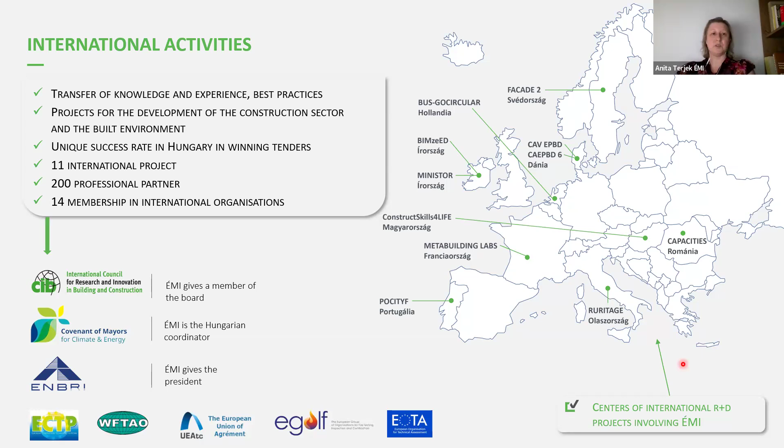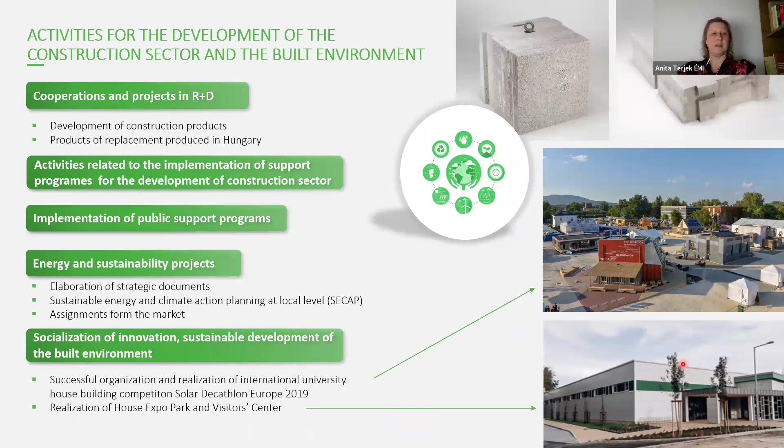Let's see the international activities of EMI. As Professor Hestek mentioned, we are members of many international associations: the CIB, the ENBRI, the EOTA, and the ECTP, the European Construction Technology Platform. I will show our activities, providing details of these international projects we are doing, and just have another slide showing what we are doing.

Beside these two directorate activities, we are involved in regulation and other projects like sectorial researches and technical security control of elevators.

Now, back to my title, what I would like to show you is sustainability. Regarding sustainable construction, we have to take into account the building stock. That is what I would like to show you: our Hungarian building stock, the typical dwelling types, and showing those problems we are facing today.

Our built heritage is important, which we cannot really eliminate for technical, cultural, or economic reasons. In terms of the built environment, the existing building stock accounts for by far the most carbon emissions, and that's where the greatest opportunities for savings can be found.

I just collected the principles of sustainable construction. We have to minimize resource consumption, so conserve. We have to maximize resource reuse, use renewable or recyclable resources, protect the natural environment, create a healthy, non-toxic environment, as well as pursue quality in creating the built environment.

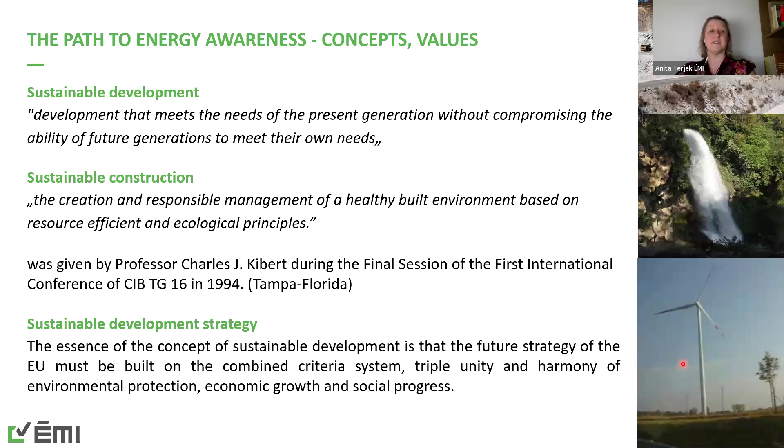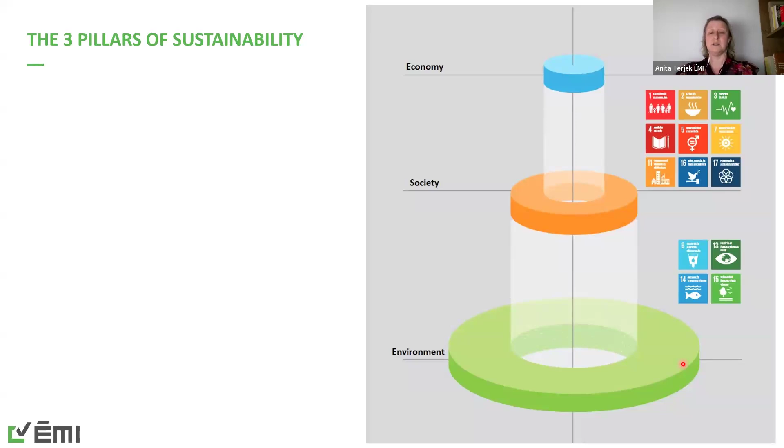I think the same happens in the US, but we are facing this here in Europe and in Hungary. Sustainability, in this case, depends on achieving the lowest possible environmental impact while encouraging social and economic development. Society demands new infrastructure as we are moving into cities, and our cities are getting bigger and bigger. So we have to take into account reduction in the consumption of energy and resources, and implementation of sustainable or green construction. These words are, I think, not new to you.

These are the Sustainable Development Goals, and we can say that these goals are ambitious and indicate a challenging path ahead of us. These SDGs were designed to be a practical implementation guide for sustainability, consisting of specific targets and measurable indicators.

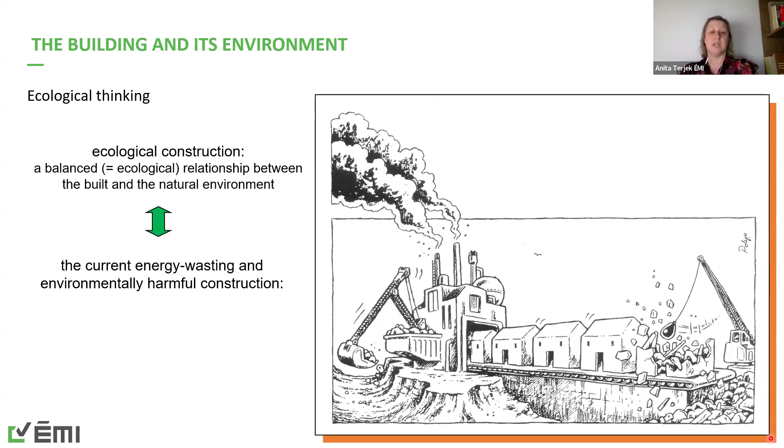In order to understand it better, we need to know the building and its environment, how they act upon each other. The environmental impact of buildings is also significant in terms of energy consumption, greenhouse gas emissions, and waste production. This is especially true if we look at the entire life of the building, as you can see on the picture, from the extraction of raw material to the production of building materials, through the construction, and then the end of the life cycle.

When I teach at the university, especially this construction subject, I usually talk about the two extremes, the two sides of the scale: the dark green and the light green group. The dark green group says back to nature, use only natural materials, use traditional technology, and minimize energy consumption. You can follow it or check it out in smaller settlements, family houses in Hungary.

On the other side of the scale, we can talk about the light green group, which says that we can use high-tech application. These are expensive but progressive solutions and lead into a large investment, in urban environments.

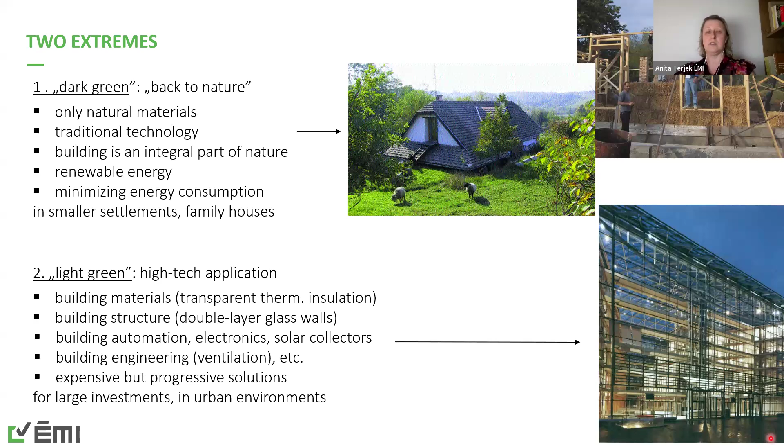So when we check that landscape and we would like to place our dwelling somewhere, we need to know the landscape, we need to know the wind direction, we need to know where the true north is, and we can place that house in the perfect place if we know these tricks how to do that.

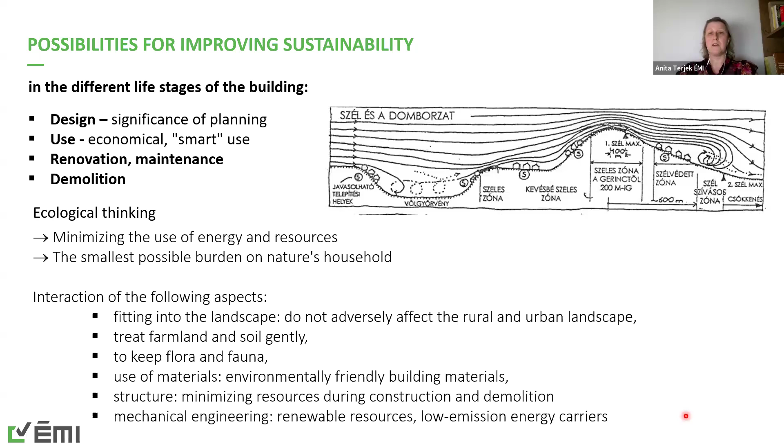The first project, what I would like to show you, is how we could reach not just the students or the scientific group around us, but we have this duty to talk about sustainability to the ordinary people, to the man on the street. So this project was about raising the awareness and widening the knowledge of the general public about the environmental impact we are facing in the building industry.

We prepared a handbook, not just in the national languages like Hungarian, you can see the consortium, or Italian or Finnish, but we provided the English version of it. In this handbook, we talk about LCA, we talk about requirements, and we collected best practices.

Beside the handbook, we provided a web application where people can check the environmental impact of different building materials and different structures. This is the point where I would like to show you one type of our building stock, which is this small house, part of the vernacular architecture, the origin of Hungarian folk architecture that goes back several centuries.

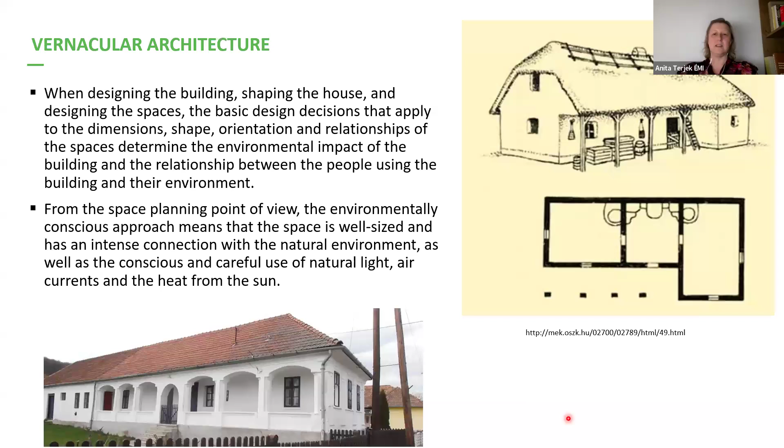So in the handbook, we put together all the requirements related to building structures and buildings, but in a simplified way—not a scientific version, but a simplified way so that our family members or somebody I meet on the street can really understand the problem.

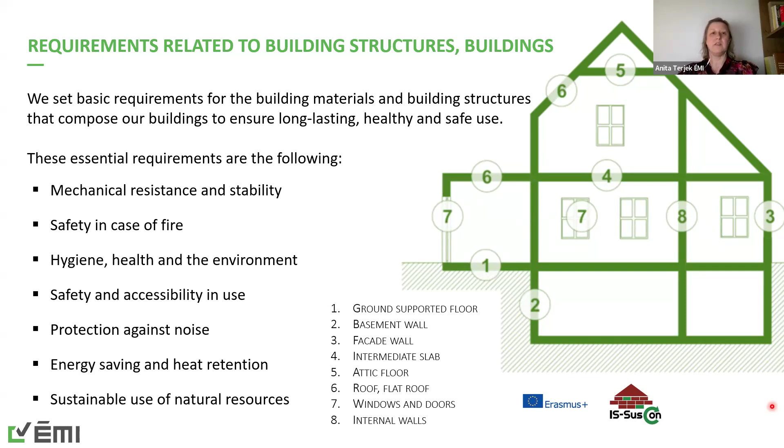We provided a small simplified house showing the different building elements, and in order to understand the problem, we provided the typical structures for these building elements and how we can evaluate the advantages and disadvantages of the different types.

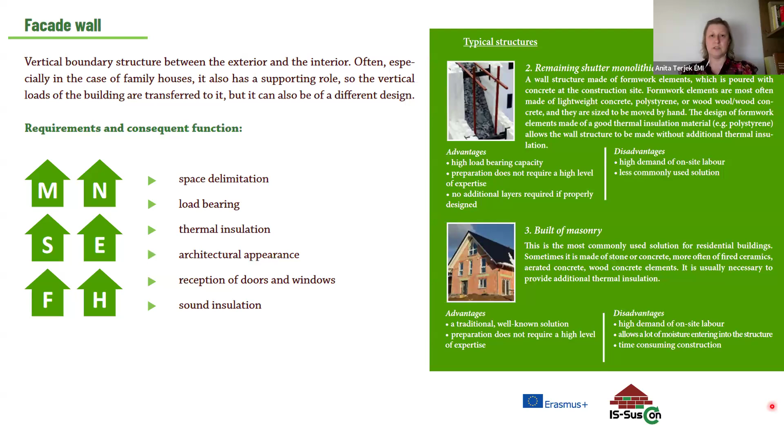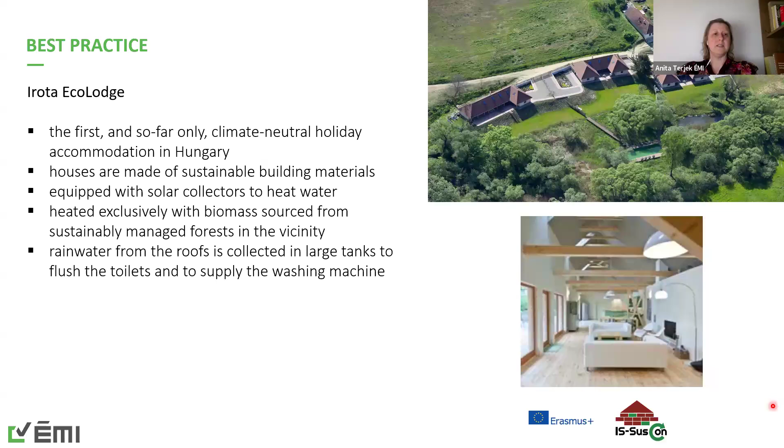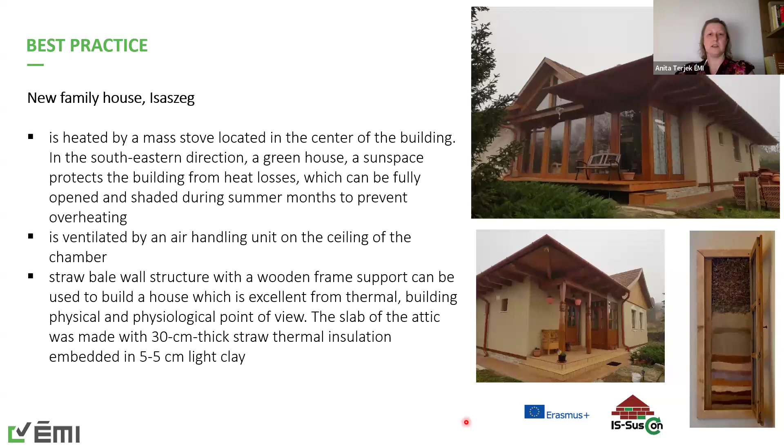Through that handbook and providing this information through the project, we wanted to show that not just the declaration of performance, which is a required document here in the European Union, but beside that DOP, the EPD, the Environmental Product Declaration, is also important. This declaration is a Type 3 declaration that can quantify environmental information or impact through the life cycle assessment of a construction material or building material. General rules are laid down in the ISO standard, and there's an independent third party verifying these values and results.

There are programs in the EU, what I showed here, and I wanted to just check if the same document exists in the US, and I got these programs: the SMART EPD, the UL Environment Laboratory, and the ASTM International, which is the Standardization Institute, as far as I know.

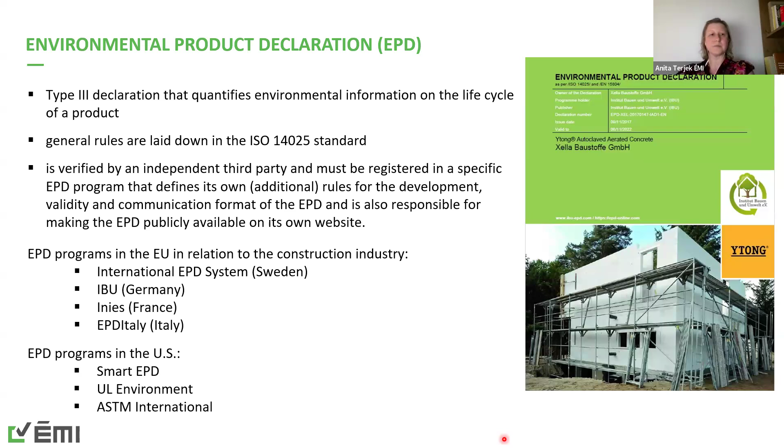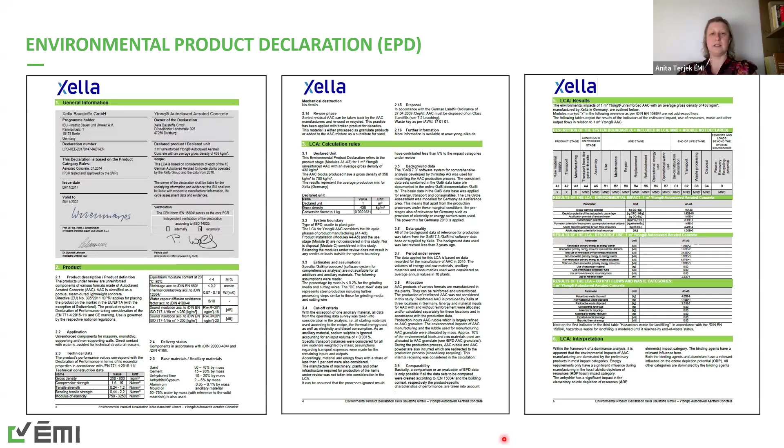Some details about the Environmental Product Declaration: providing description of the product, the manufacturing process, and then the LCA and those values, the results concerning the life cycle assessment.

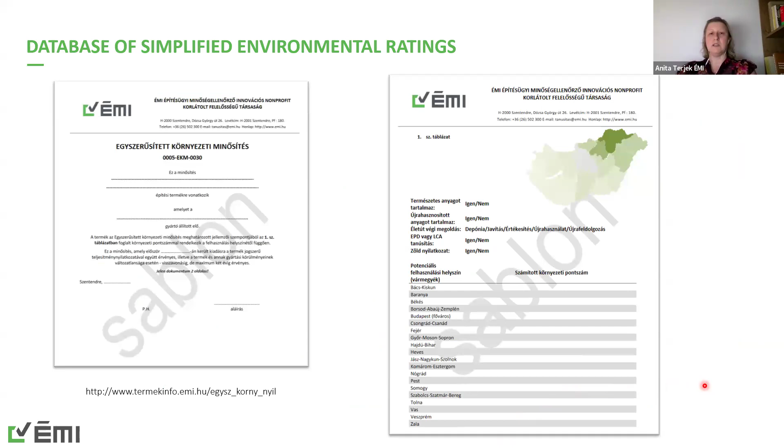And in Hungary, we are now introducing a database. There are simplified environmental ratings - we will do it soon. And there will be another database collecting the detailed green declaration. So it's not just a declaration in the future, we have to do it now. And these declarations are really important in the procurement.

I mentioned the term life cycle stages. Now I can show that to you. These modules are described in detail in this EN standard. According to this picture, we can talk about the product stage, the construction process stage, the use stage, and the end of life stage.

Not just a product, but a construction work, so for example a building. In the product stage, we take into account the raw material, the extraction, the transportation, and then the manufacturing. And we have to take that manufactured product into the construction site and create that building.

During the use stage, we need to repair or do some maintenance or replace some parts of the building. And this is our new concept when designing a building now. In the design phase, we have to take into account the end of life stage - what we will do with that building. We can just demolish it, but it's not the best; we can use some parts or reuse those materials. So that is what we would like to show and demonstrate.

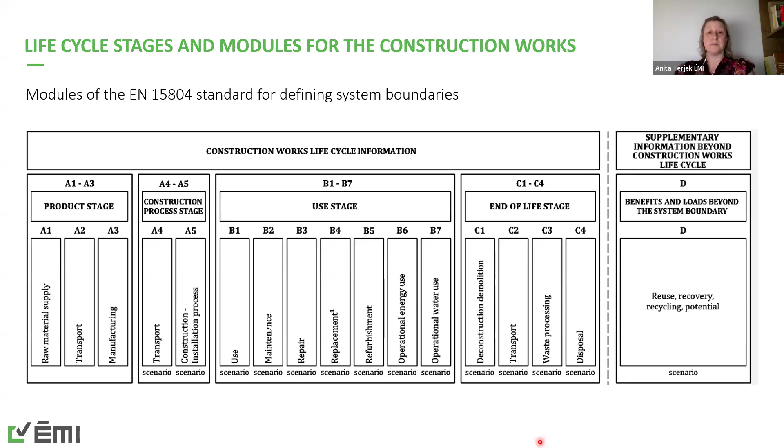The next project concerns the establishment, installation, or building of our headquarters. This project is called PIME'S - so it's a really good play with the words, 'play it more efficient, Sam'.

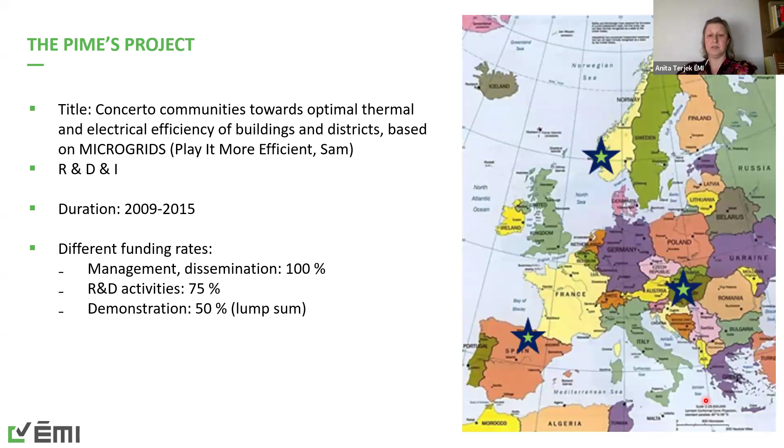This is the Concerto initiative that was established in 2005 by the European Commission, defining concepts were sustainability, replication, and cost effectiveness. The project aimed at revolutionizing and modernizing cities' energy systems. Let me show the pictures.

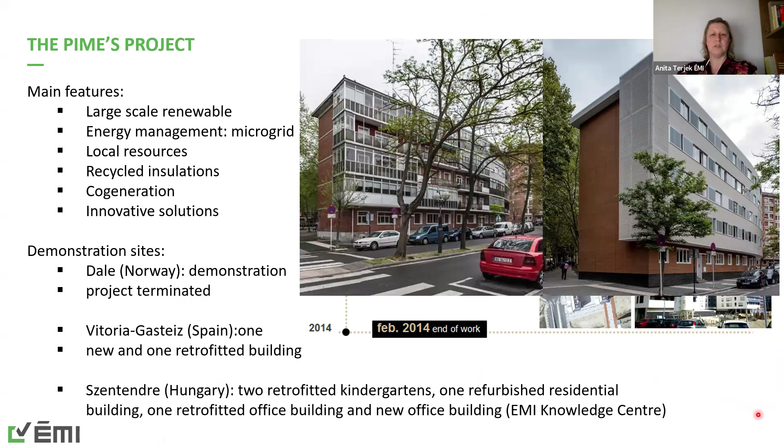The demo sites were in Norway, in Spain, and the last one was in Hungary, in Szentendre, where we have our headquarters. Let's see the map of Szentendre. Szentendre is a small town situated next to the river Danube, and this is just 30 kilometers away from Budapest to the north.

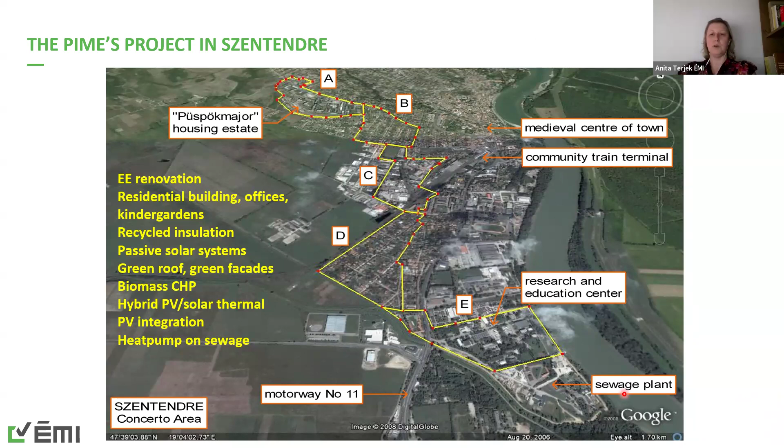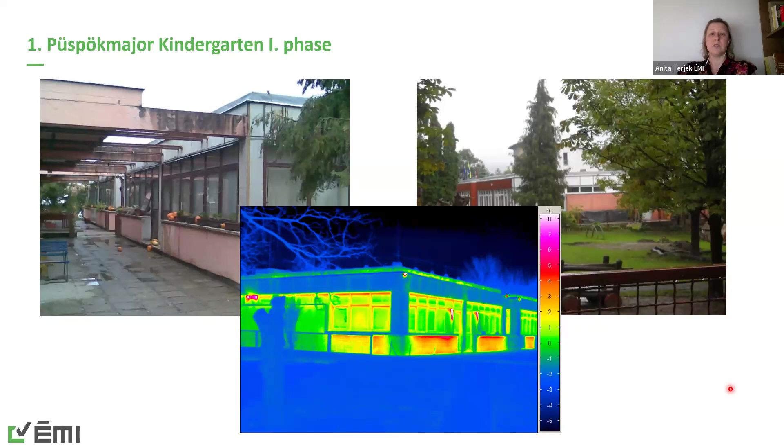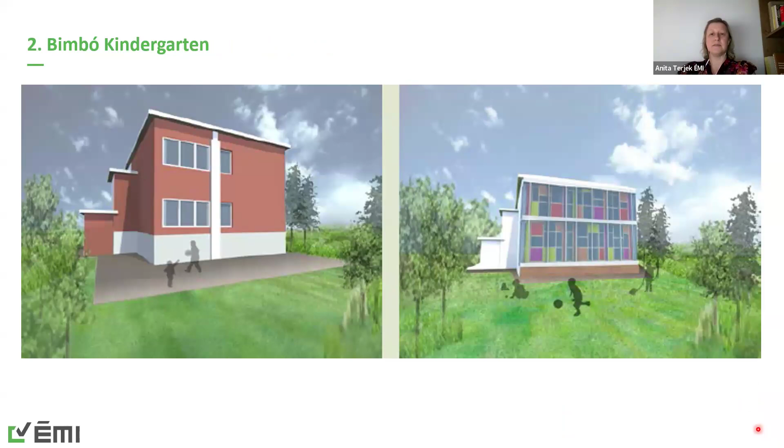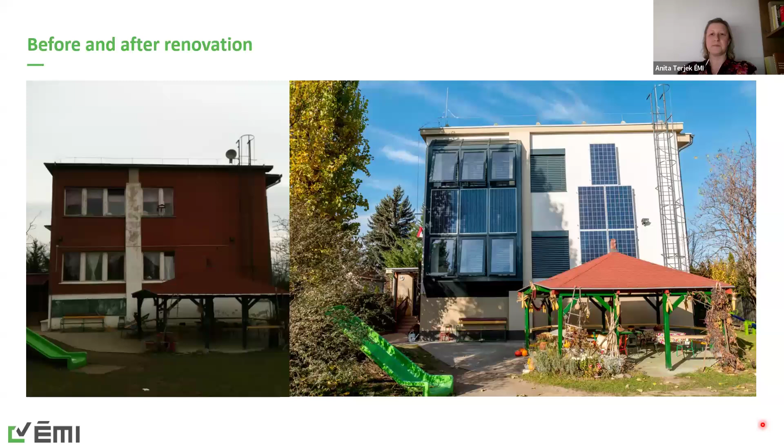In this project, we had 4 demo sites or demo buildings. The first one was a kindergarten - I'm going to show you some pictures about the demonstration work. Some new parts: the PV integration, the refurbished kindergarten, the 3D design, and now you can see in reality, you can compare the before and after picture. Not just kindergartens, but panelized residential buildings were refurbished.

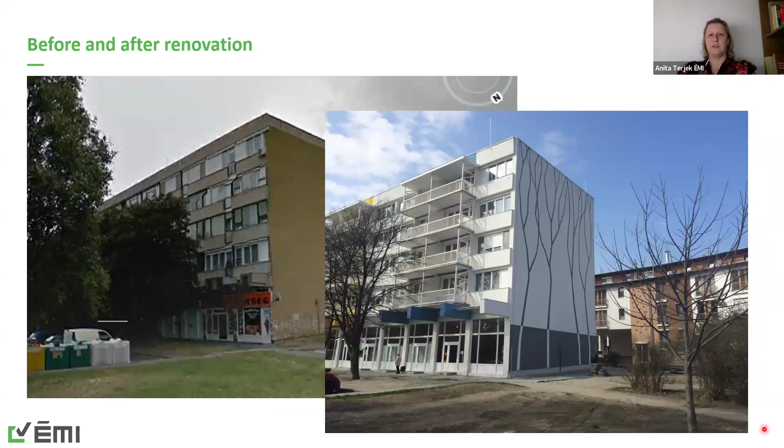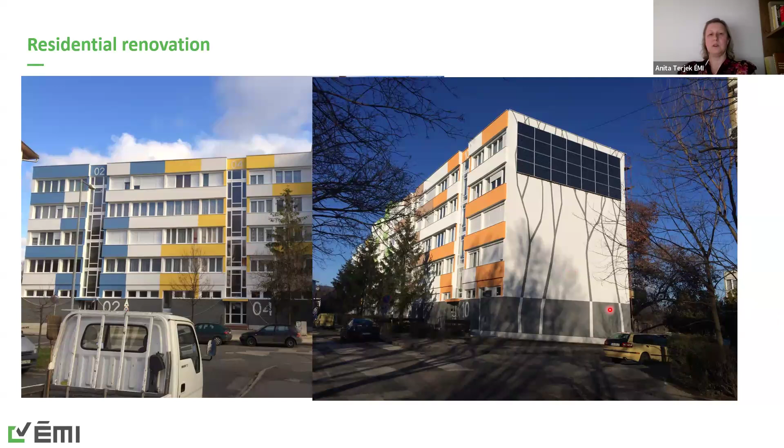Again, the before and after - really, really nice pictures showing those tasks like integrating PV on the facade, or just installing new windows and new facade insulation.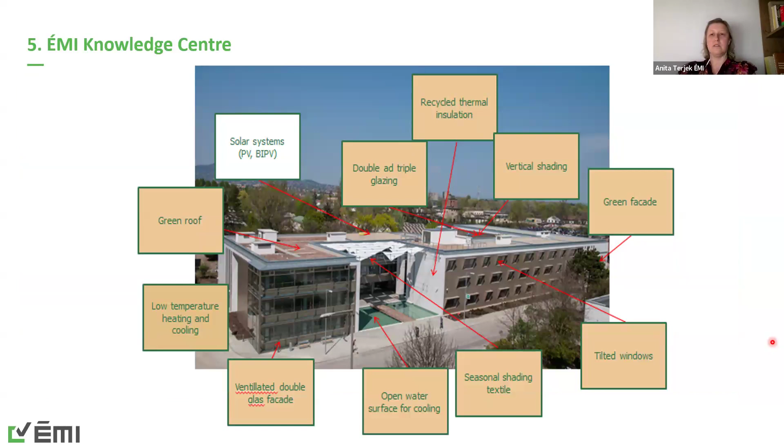This was an office building, refurbished, and now we reached our knowledge center in Szentendre, the headquarters of ÉMI. With this headquarters and the demonstration, we would like to show the bioclimatic design methods.

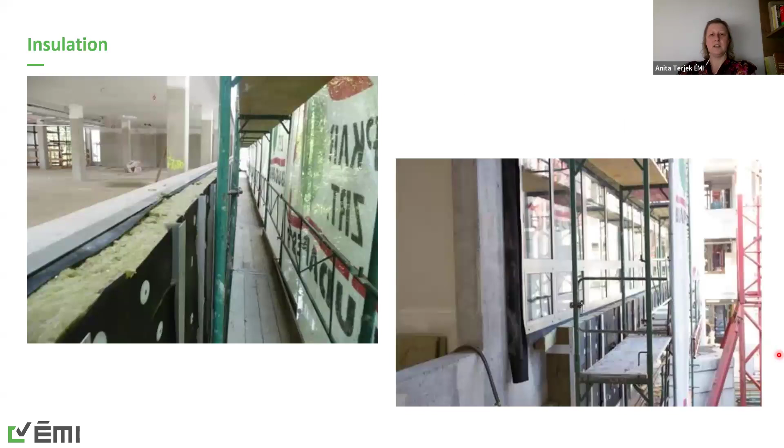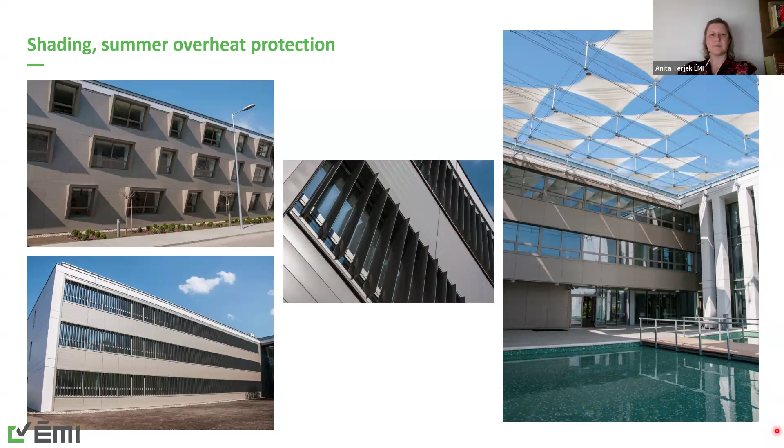Let me just show some pictures about insulation, different window types using the bioclimatic design, like these box windows where we can shade - we can use these boxes as shading. Green facade on one end, and on the other corner we can find a climate facade.

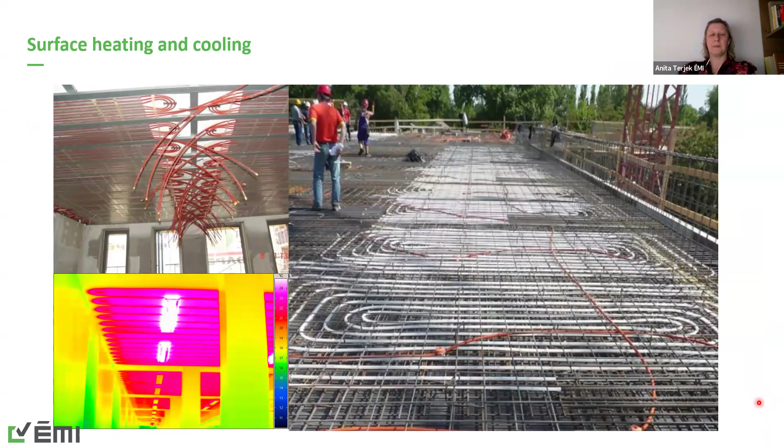We use low temperature heating and cooling system, and again, the use of solar panels integrated into the building in different ways can be seen here.

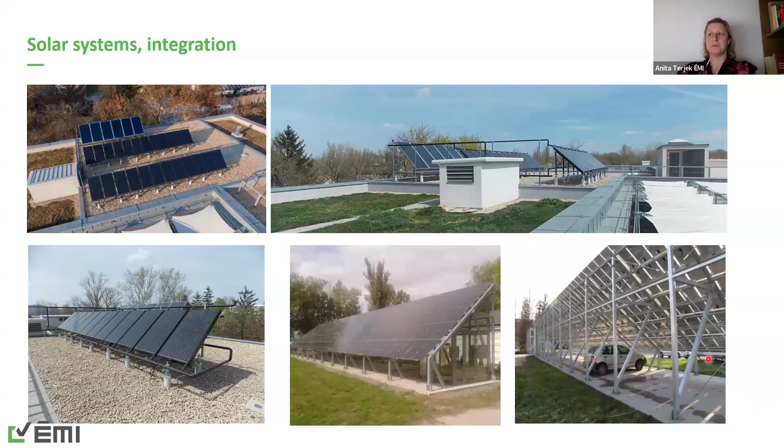When it comes to energy efficiency, one of the biggest potential savings in Hungary can be found in residential buildings. In total, there are 4 million dwellings in Hungary, 3/4 of which were built before 1980. At that time, energy efficiency was not a consideration in construction, nor was it a legal requirement. A deep energy renovation of 100,000 residential buildings per year would be needed to renew the domestic building stock.

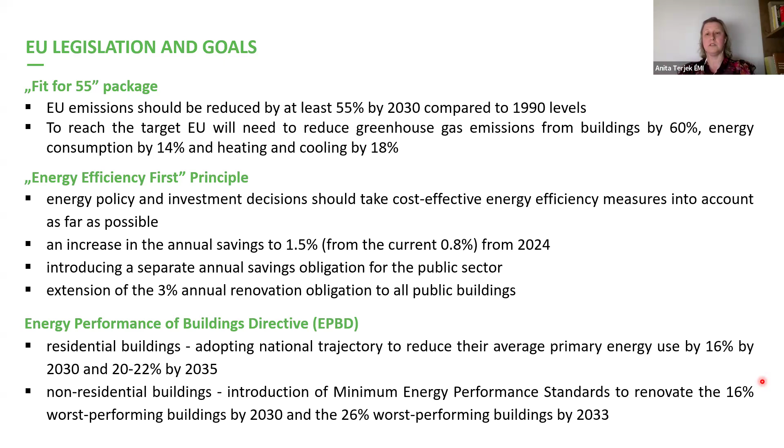Energy renovations are ongoing, and the fresh news, or what we can learn nowadays, is that the EPBD recast, the Energy Performance of Building Directive recast, was adopted. The voting was done on the 12th of April. And why I am mentioning this is because we were, and we are again, part of this concerted action. These projects support the implementation of the EPBD through exchange of information and experience among project partners.

That was the 5th edition, and now we have the 6th edition with the new website. You can check it out. And our task, as I mentioned in the abstract, is not just doing it in our small community or talking about it, but we have to show, we have to demonstrate these activities. And this is what we are really proud of: organizing the Solar Decathlon Europe in 2019.

Actually, this competition came to Europe from the US at the turn of this millennium. Richard King, a scientist in the US, had this vision that he believed the best way to encourage energy literacy was by empowering the change agents of tomorrow, so the students. By this, the competition was initiated, and the first Solar Decathlon was launched in 2002 in Washington, D.C., and came into Europe in 2010 in Madrid, Spain. Another one followed after 2 years, in 2012, then it moved to Versailles, and we could organize this one in Hungary, Szentendre.

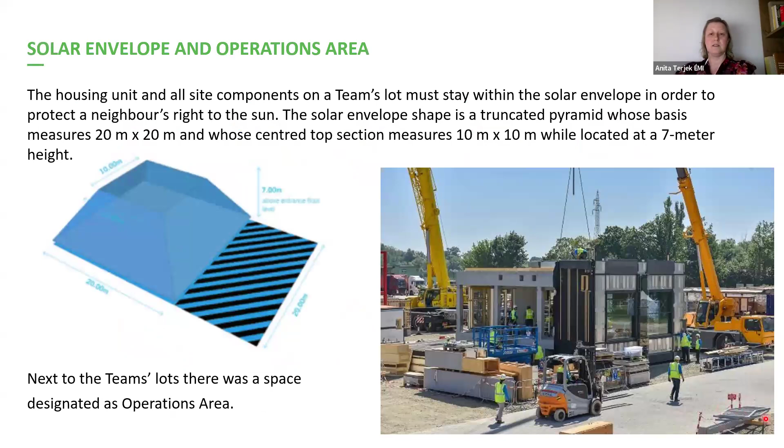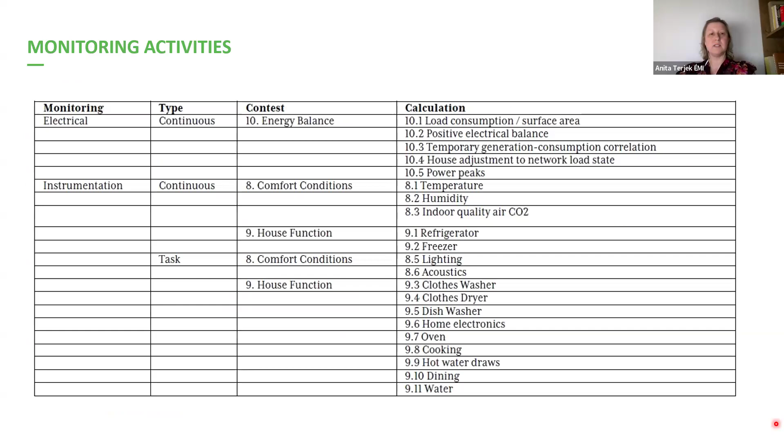These 7 are juried contests, and there are 3 that were measured: comfort condition, house functioning, energy balance. So a monitoring system was installed in each prototype. You can see the building site, and in the rules there were strict instructions on how the drawings shall be identified. You can see the monitoring activities here, and the 10 prototypes.

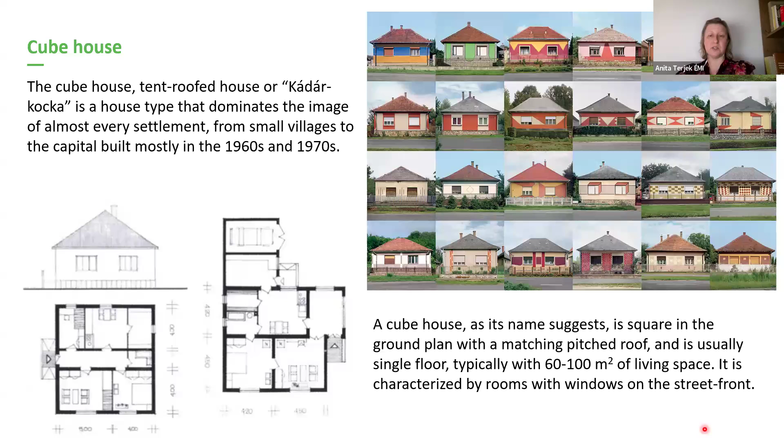And with this, I would like to move to the other typical dwelling type, the cube house. There are around 800,000 of these square houses, or cube houses, with tent-like roofs, as you can see here on the elevation. You can see the floor plan, and these houses were built between 1960 and 1980. Most of the buildings are in bad shape, so they need deep renovation.

And one group showed a really good solution. This is a consortium of a Hungarian and Algerian university. It's called the Hungarian Nest, and they provided a cube house renovation. They applied many innovative technologies, as you can see and read here on the screen: speech-based emotion detection, the Venturi Tower, which I will explain on the next slide, and they mixed active and passive energy.

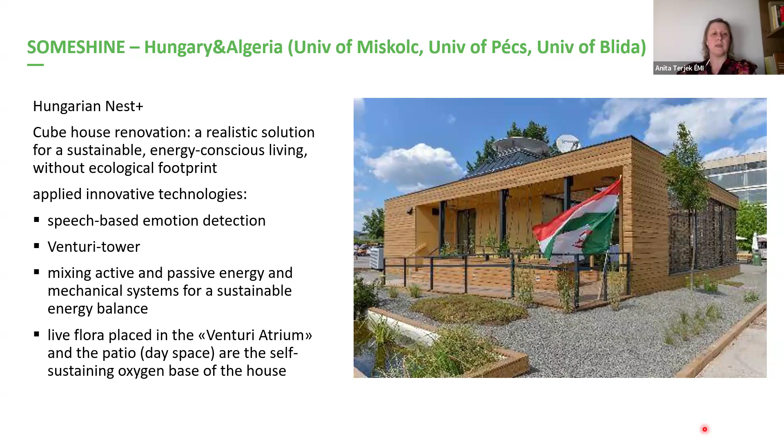And here you can see the system, how the passive ventilation is shown. So there is a basement under the house, under the building, where the air can cool down, and through 4 small doors we can let the air penetrate into the house, the internal side, and then through this tower, knowing the physics, the heat will rise up and leave the house.

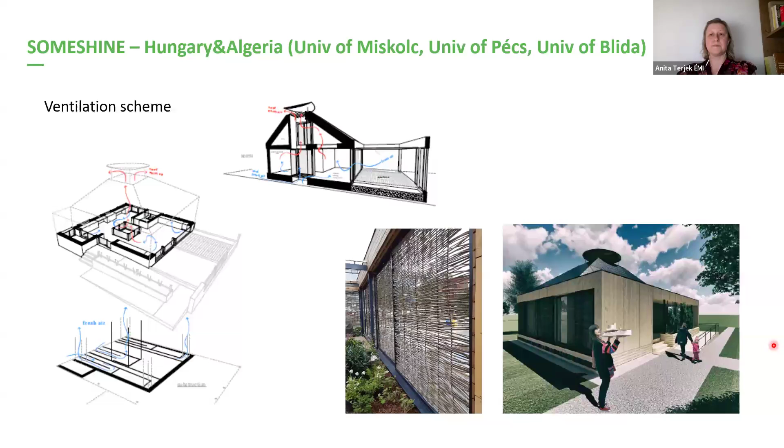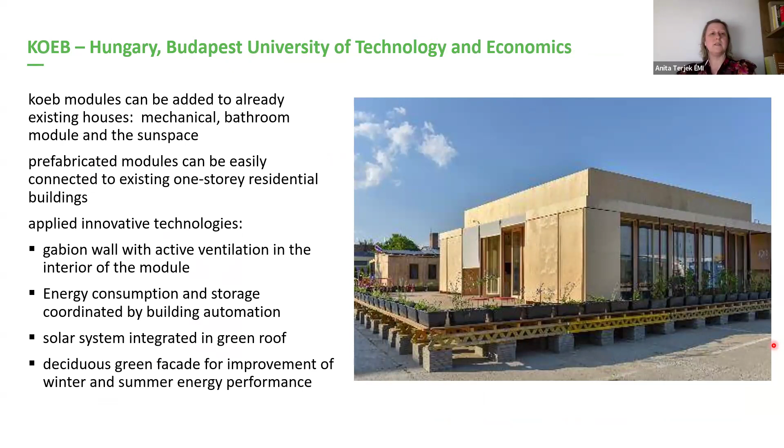The other solution was a really good one, providing modules to be attached to the existing house. These modules can be a mechanical one, a bathroom module, or a sun space. And you can see the concept: if you have a family with more children, you can add these modules to the house, or just when the children go out, going to university or moving out from the house, they can easily reuse the space.

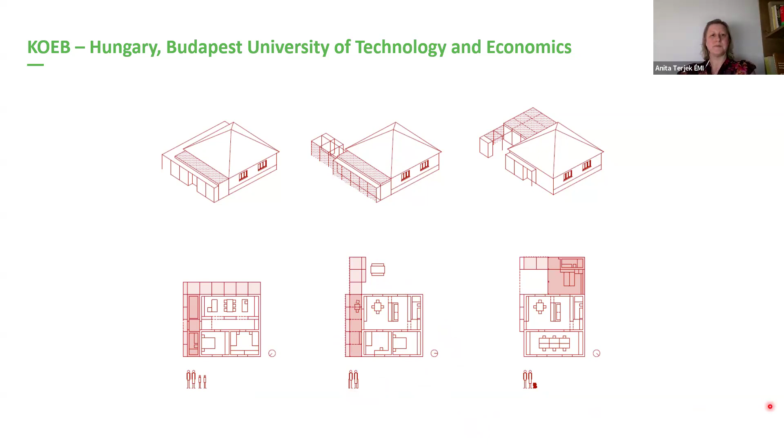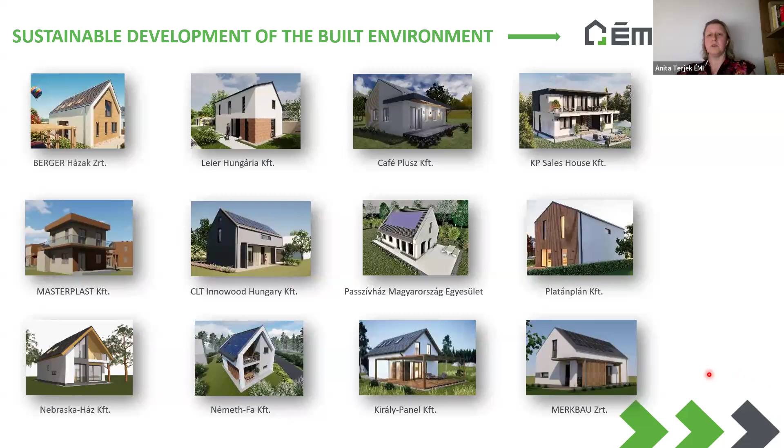With these concepts and prototypes, we would like to have a national prototype expo park, because not just this type of houses can be renovated, but other solutions can be provided by manufacturers.

Moving closer to the end of this presentation, the other project I would like to show has a really important task: to train other trainers to provide lectures and train architects and civil engineers practicing and talking about new initiatives. This is the BIMzeED project, educate for zero energy buildings using building information modeling.

The term NZEB refers to zero energy buildings, and building information modeling, or nowadays building information management. The aim was to directly target educators and private industry trainers and provide learning units and training material for them. First we checked out the needs, then provided these trainings and got feedback from them.

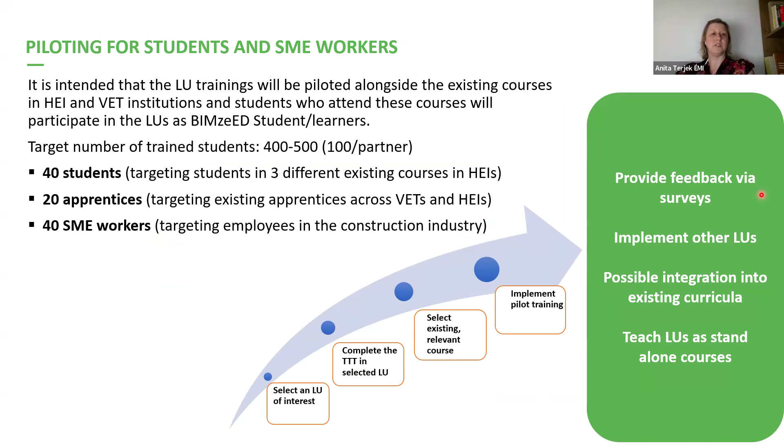You can see the piloting for the students represented here: 20 apprentices, 40 SME workers. We implemented pilot courses where we provided 12 learning units. 25 pilot courses were completed, with students from 4 countries, more than 400 trainees.

The last project talks about another new term, the circular economy. We won't have enough time to talk about it, but I'd like to raise this question to you - if you know about it or want to learn more, you can check it out. This Go Circular project is about stimulating demand for sustainable energy skills with circularity as a driver.

That project focuses on multifunctional green use of roofs, facades, and interior elements. This is the circular transition - we have the energy transition, material, climate, and digital transition. In this project we work with a full value chain approach, involving and connecting relevant people and expertise by applying the so-called key elements framework.